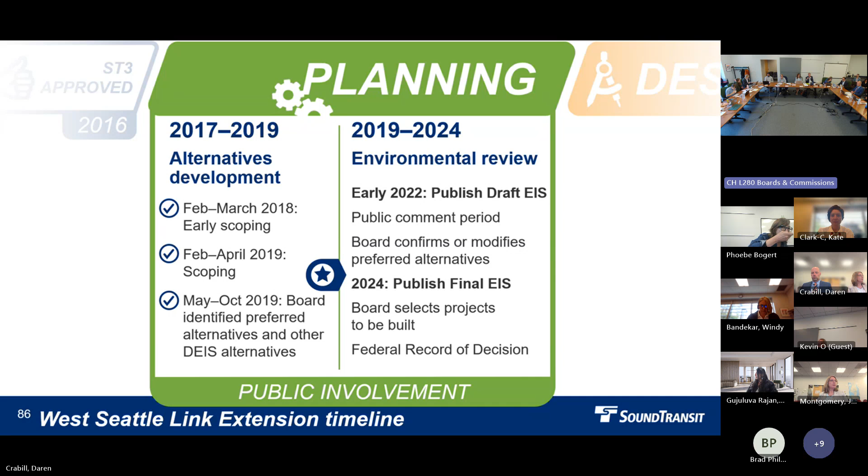I'll skip to each of these slides and just quickly note we went through level 1, level 2, level 3 analysis with a stakeholder advisory group and an elected leadership group, ultimately making recommendations to the board for inclusion in the draft EIS.

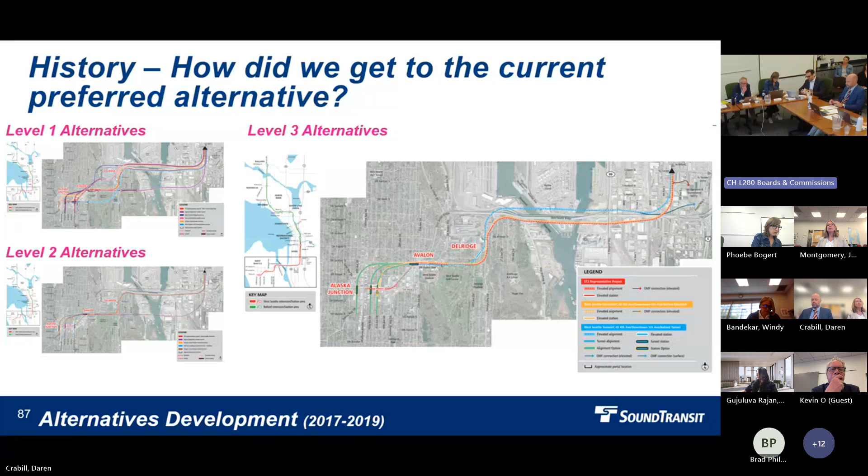The Yancy/Andover alignment came out of initial assessments requested by the board in order to minimize residential displacements in North Delridge and also to connect to tunnel stations in the junction, but in a more affordable way. That's a really important point for Avalon, because to have a tunnel station in the junction with a below-grade Avalon station, this alignment through Delridge is necessary to meet the lower cost for that alternative.

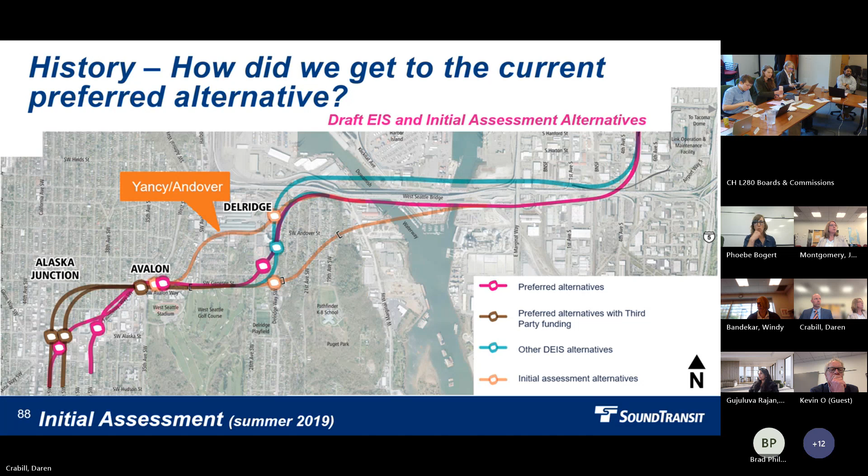Following that initial assessment, the board identified all of the alternatives for the draft EIS, including those that could connect either the tunnel or the elevated. After the EIS comment period, which had over 5,000 comments from agencies, tribes, and the public, they modified and confirmed the preferred alternative for the West Seattle Link extension, which includes a retained cut station at Avalon that connects to a tunnel station at Alaska Junction.

A couple of things we heard through this entire process before handing it over to Darren: there was a strong interest in a tunnel station at the junction to be more affordable and comparable to the elevated alternatives that were in the draft EIS, and this alignment does that.

There's also interest in lower height guideway throughout Delridge. By connecting to a retained cut and then into a retained cut station, we're able to lower the elevated guideway and the station height at Delridge as well.

There's also a really strong interest in the connections between the buses on 35th, which serve communities to the south including High Point, and a really great transfer environment. So having entrances on both sides of 35th eliminates the crossing of a busy street for many people as they're transferring between bus and rail.

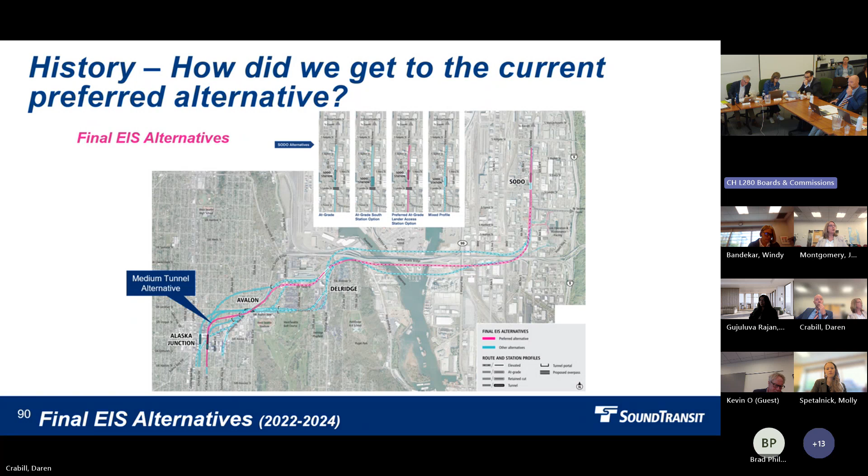We're going to get into more about the station area context plan, but... Is there a section that shows, you know, here's Delridge, here's Alaska, here's why this was the happy medium?

Something akin to what we would be doing in the future review of Delridge. So in today's session, we're dealing with everything from Avalon out to Alaska. We'll go back the other way next time.

Next, when we come back and talk about Delridge, we'll be talking about the elevated guideway on either side. They're certainly connected, so it's a really great question.

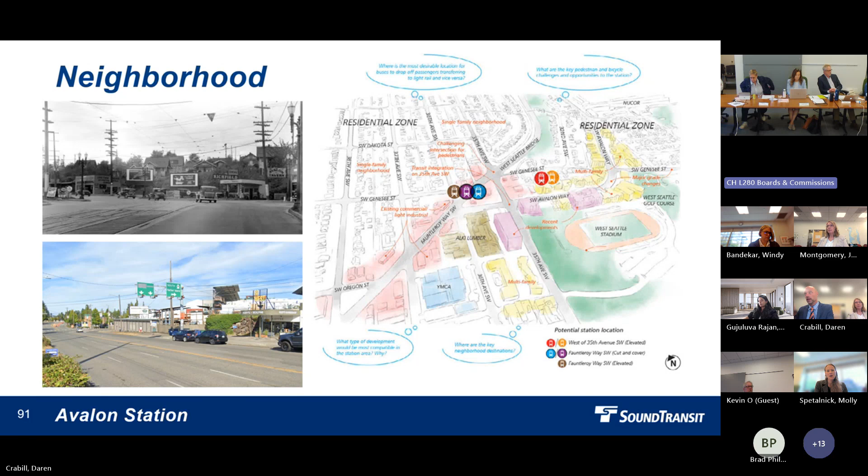Similarly to Alaska, I'll walk through some of those early ideas in the first couple of phases. Again, we're talking about years of work in a single slide, just to set the stage. This is a really dynamic intersection with ostensibly three different arterials converging at the same place. There are also key pieces of recent development and future development likely to happen, some small commercial corridor, as well as important community locations like the YMCA and West Seattle Stadium. At the time, the team highlighted how we can locate pickup and drop-off, and prioritize safe pedestrian and bike circulation as a priority, and whether there are ways to connect the key destinations through those paths.

As Jason outlined, the cut and cover actually provides some opportunities for locating the station at the crossroads, and I think we'll start to see some of those in the next few slides. Here you can see some of that next level of analysis around existing land uses, ridership forecasts, and how people will get to the station, with the primary mode being walking within the station area, and the next being bus connections.

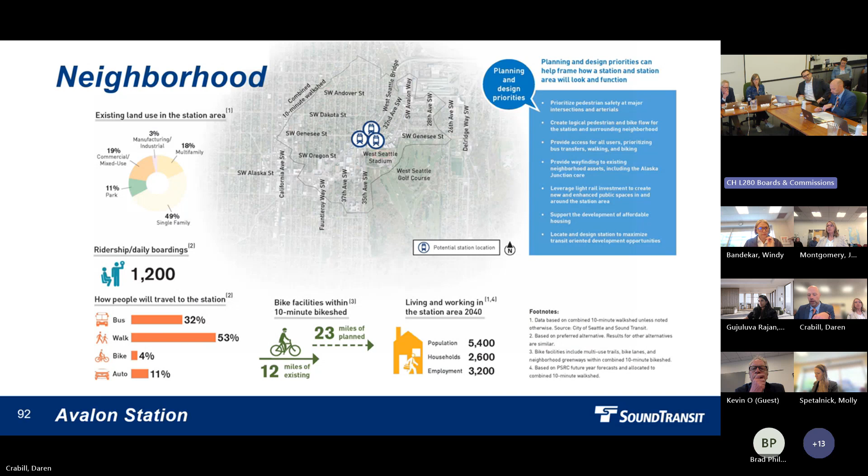The priorities I just want to highlight that were reinforced at this phase again are pedestrian safety at the busy intersections, helping provide a logical pedestrian and bike flow to the stations, and whether there's an opportunity to create new and enhanced public spaces in the area.

Here at Avalon Station, again, it is rooted in that emergent urban land use type. We'll see that there's recent development happening in and around the station, but it is primarily located in the south and east quadrants of the station area, so there's potentially more to happen around there.

This doesn't have the large block sizes that Alaska Junction does, but because of those arterials it's split up, so you don't have that great continued connection. But because it is walkable, we're noting it as a walk, bike, roll station, with mode share expected to be primarily walking. How do we take that into account as we consider our improvements in and around that station?

As we look to the right side of the screen, we see that it could move—you can see the arrows of potential movement. It could continue to be a walk, bike, roll station within the established urban area, but we see it becoming more multimodal over time as bus connections develop and people get used to using light rail in the area, possibly utilizing those connections in the future.

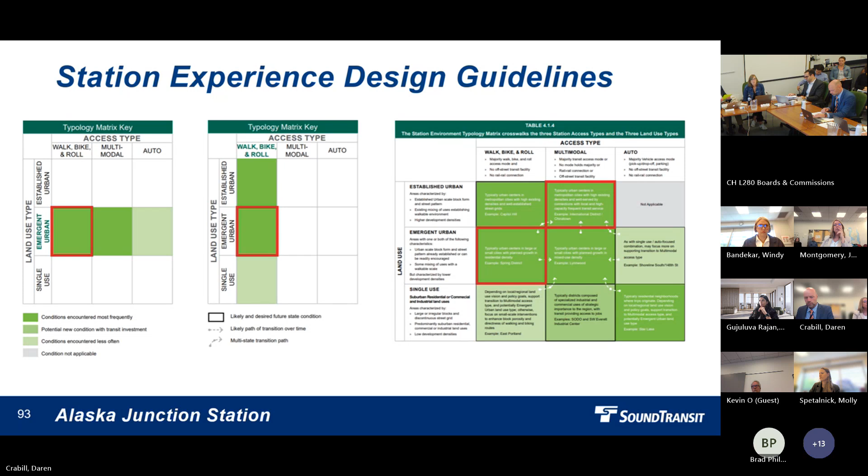We point out that we're looking to provide bike or bus connections close to the station. At that time, King County Metro was looking to put bus stops more rooted on Avalon to make that connection, in addition to on 35th, right in front of the station areas. They located the PUDO and paratransit on Southwest Genesee Street by that northeast penthouse—again, a quieter location outside of the movement of buses and the key pedestrian and bicycle movements.

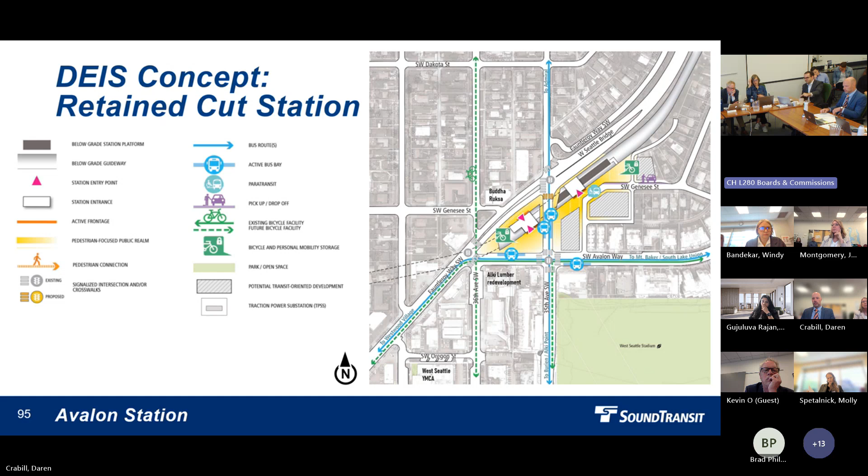This is also the portal location, as Jason mentioned, as a retained cut. You're coming from the northeast into a retained station area, and as it goes under 35th and to the west, that is where the portal and the start of the tunnel begins. So there are those similar ancillary facilities necessary to provide air circulation there.

You'll notice in some of these subsequent diagrams that the station locations were in a different place, but ostensibly the same takeaways noted here transfer over to where the preferred alternative landed. At that time, some of the priorities were: can we partner with the city to upgrade facilities for bikes and pedestrians connecting in the neighborhood greenways? How do we locate bike storage in an easy and accessible way for those who use it? And third, explore potential elimination of the slip lane to reduce conflicts with pedestrians and narrow that cross section.

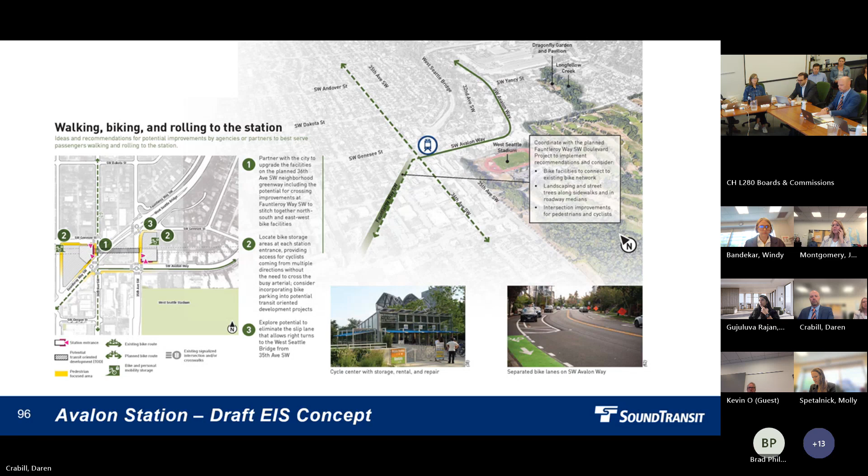Thinking about bus connections, how do we provide those seamless transfers that happen to neighborhoods from the north and to the south, like High Point? There's a concerted effort to locate those bus stops in close proximity to the station.

I think there's also interest in exploring slow streets for plazas and those bus zones, perhaps coordinating traffic signals or crossings. There are other operational types of things you can do for safe pedestrian and bike access.

As we look to support current and future land uses, we've seen quite a bit of growth in the West Seattle Triangle area over the last few years, and more is planned. How can we site the stations to further that interest in the neighborhood? Can we support active uses along those key corridors and frontages, either of the stations or with the development that happens adjacent to it?

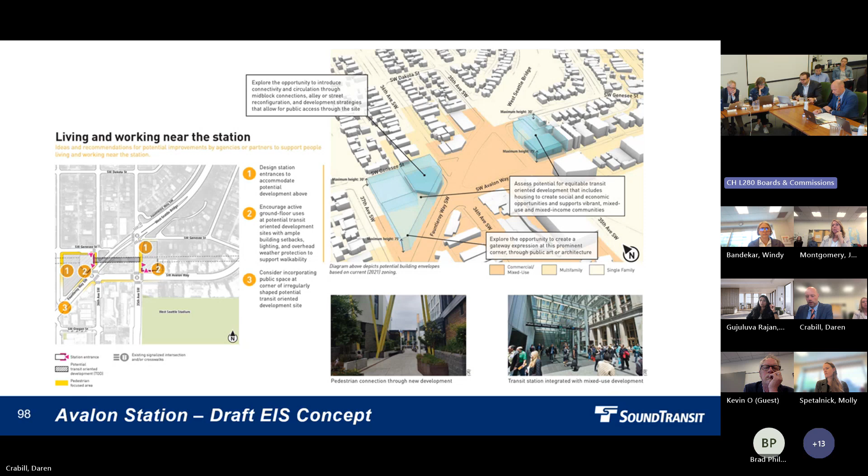Also consider public spaces that enhance the station entrances. Can we create plazas, wide sidewalks? We'll see some of that coming, accommodating that transfer zone and mixing zone between different modes coming to the station, including transit transfers.

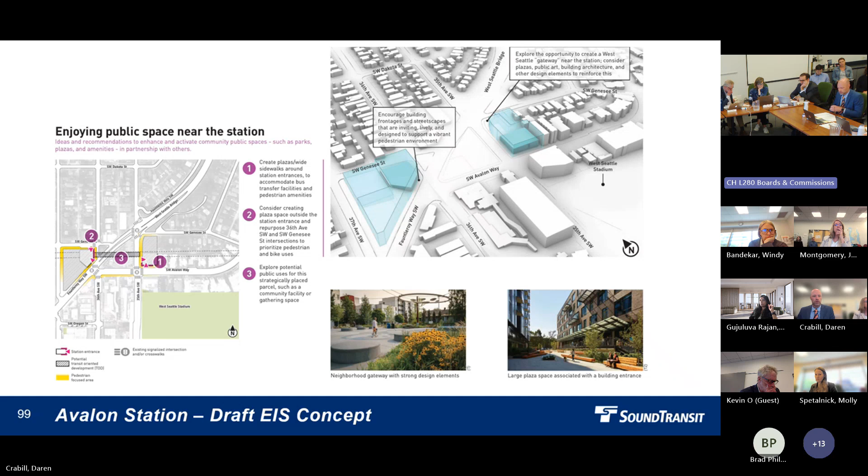As we move to the preliminary engineering concept plan, you'll see that where we ended at preferred alternatives is quite similar to what we see here in the PE concept. With some slight modifications, we've added a pedestrian crossing on that east side leg of the West Seattle Bridge, crossing Fauntleroy Way southwest, north to 35th.

You'll also see a change in where the bus stops are located. King County Metro continued to look at how best to provide frequent bus access, and decided to remove the bus stops on Southwest Avalon Way and use existing bus stops near the West Seattle Stadium. We still do have some buses that land right at the entrance on either side of 35th.

I'll also note that, as I mentioned, ancillary facilities that need to co-locate with the tunnel portal are at that triangle location, and so that footprint of the building is somewhat bigger.

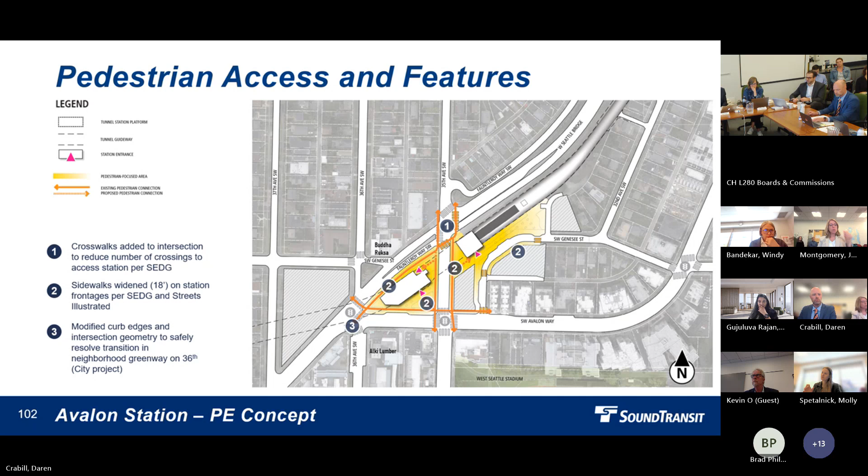Bike lanes: there are existing bike lanes on Southwest Avalon Way. We are bringing those up onto the sidewalk for access to long-term bike parking. You'll notice the bike parking spaces are reduced because they're tied to our ridership numbers, so you'll see 20 long-term spaces and then 10 short-term bike rack spaces. We fully expect the Greenway would also connect well into these networks.

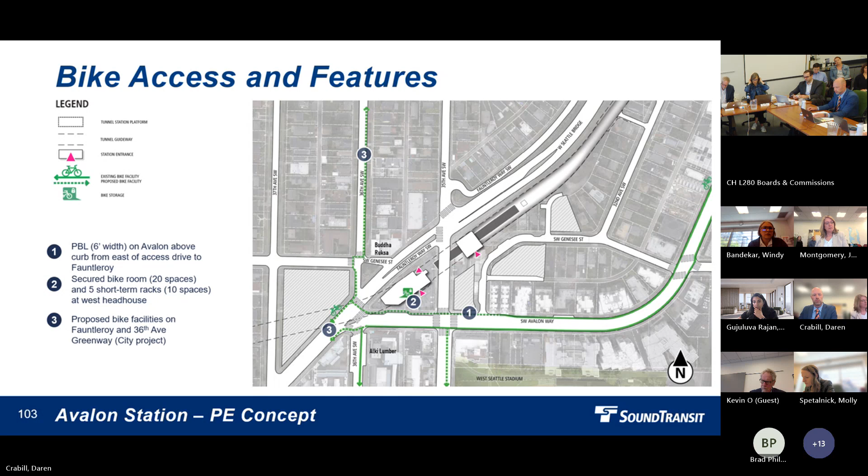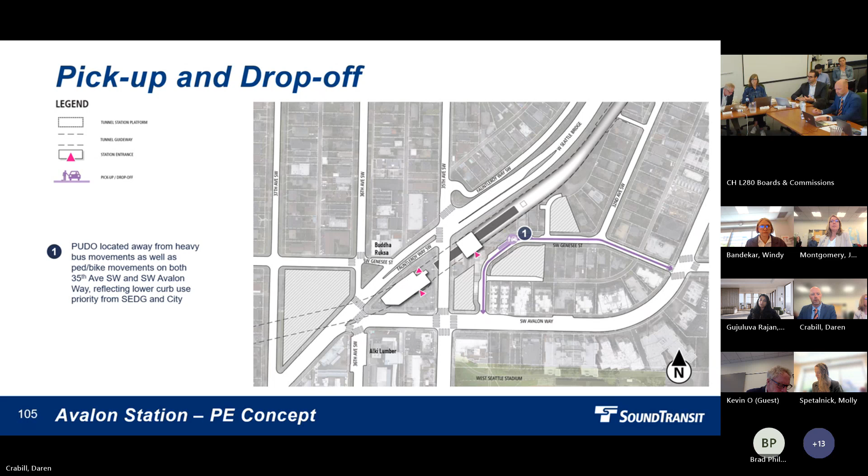Transit integration: I noted some of where the bus stops are relocated during this PE phase, and also that the paratransit, ADA, and pickup/drop-off are co-located at that northeast entrance with its own space. Here we're showing pickup drop-off at that northeast entrance on a quiet street. It's supported by the city and our guidelines.

As we take a look at TOD, all of the transit-oriented development sites at Avalon are adjacent transit-oriented development sites. None are expected to be joint development opportunities. Part of that is just the geometry and access points, potential access points, and the size and space necessary for the stations themselves and the complexities around that retained cut condition. So we feel like the best opportunities for development are in those adjacent sites that we are using for staging and construction during the construction of the line and the stations.

I will note that I didn't put a number across the street at Fauntleroy to the west, but that is also expected at this point to be part of the staging area, though that would also be a development.

Plazas are provided at each of the station entrances, providing that sort of transition space from sidewalk to the station lobbies themselves.

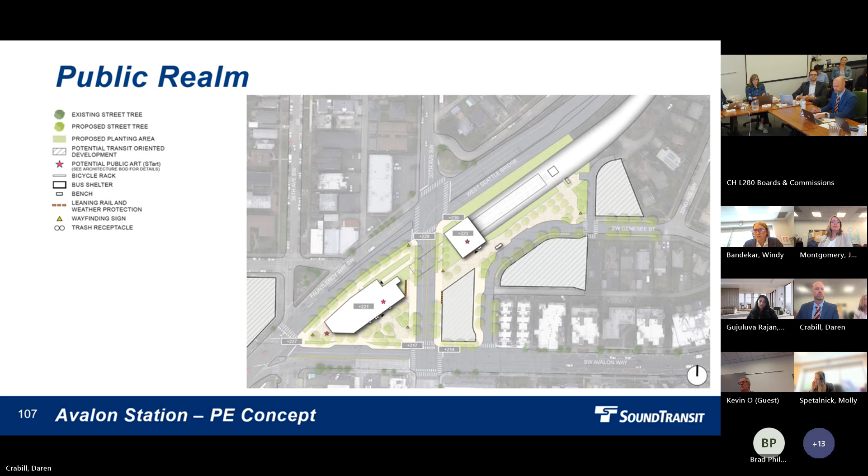Here you get a better sense of where potential TOD and what kind of massing that might provide in and around the station, those properties that we are using for staging and construction.

These again are all adjacent, so future, not during the construction of the station, but post construction.

Key themes from the fall engagement: this is a lower ridership station location, and we see that in how respondents said they would use this as their primary station, and that the walking and transit are somewhat in line with what our projections would see as the split of mode.

Similar to what we saw at Alaska Junction, people primarily want to see more affordable housing and rental housing as their primary TOD use. And at the ground floor level of those activated streets, food and drink, retail, and convenience and errands are the top priorities among them.

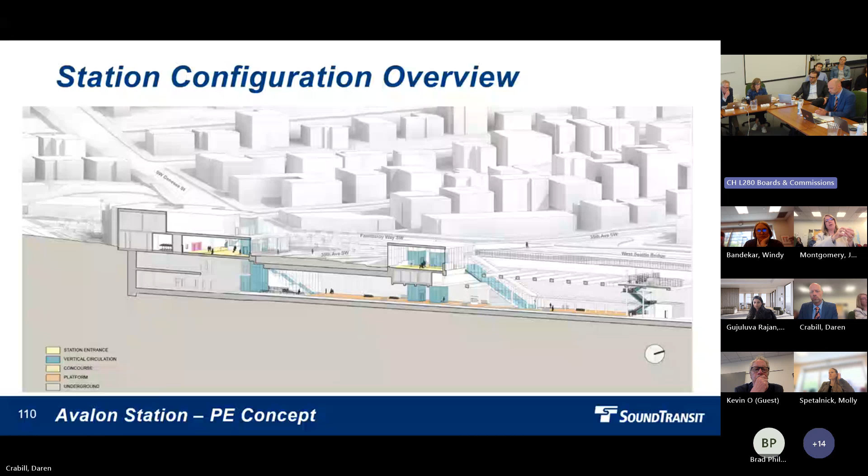And then we also have the fan plant. This is the end of a tunnel, and we've got to be able to evacuate the air in the event that smoke builds up. You do that at the end of the tunnels, you suck the air out for safety. So there's no space between where the trains go and grade to put that fan plant, so that's why it's above ground, integrated into the head house of the lobby.

Dirk, you need to put yourself on mute, but thanks for being here. I just wanted to follow up with you. I might be able to. Can you mute him? All right.

So now we're looking at more of an aerial view axonometric, and we've integrated some of these green pathways of pedestrian paths coming into the station. I believe the data says that most people are actually riding from that south side of the site, and so a lot of the station is oriented that way, but you can enter from the north side of the site. So you see the passenger pickup and drop off loop on the right-hand side of the page.

35th Avenue is going up and down, Avalon's going straight across, and Fauntleroy is diagonal here. So you can see on the left-hand side, the left-hand head house in the triangular lot, about half of that space is dedicated to the lobby space, and then the other half is back of house spaces. We do recognize that that does make more of a wall around that place.

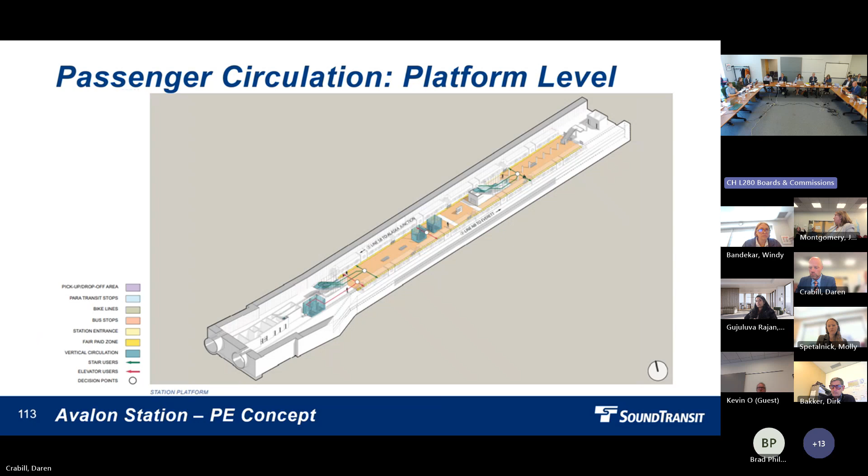Yeah, well, one aspect that you haven't really come to life on these site diagrams is how busy the traffic is around there and how motion noisy it is around that station. So we're trying to think about that, and the fact that we've heard the neighborhood feels this is a gateway spot as you're coming off the West Seattle Bridge, and the grade is funky here that we need to keep our eye on.

Okay, so this is showing the massing overall. It shows some of the street trees, it shows the plazas that are in sort of the south to southeast of the stations. So on that triangular property, there's a plaza and entry going from the corner up into the station space. This landscaping—it's not called out here, but there's that open space that could be available for TOD. And then the passenger drop-off area.

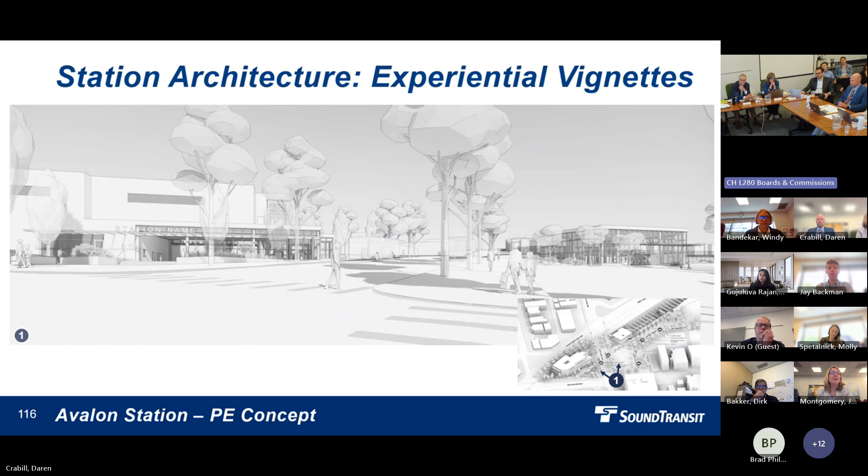Then this is as though you were on Avalon, looking north to the station. In the future we'll have to ghost in some of those TOD parcels. And then you can see the entryways as they would be seen from Avalon.

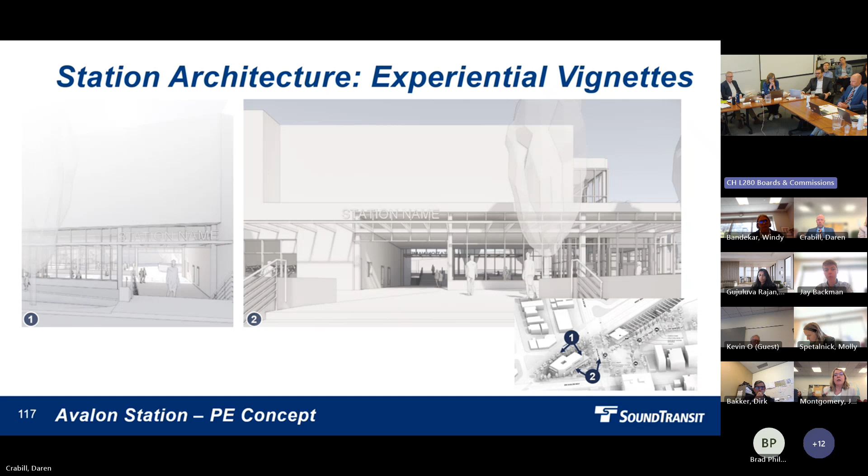And then this area, on the left-hand side, this is a vignette of what the entry looks like, more of a close-in view, as you were coming from Fauntleroy and entering into the north side of that head house. And then on the right-hand side, same head house, but we're looking at it more closely from the south side. Again, lots of transparency—you can see right through it, and really understand where you need to go and see in the distance.

And that is our overview of Avalon for you. So hopefully that was somewhat helpful.

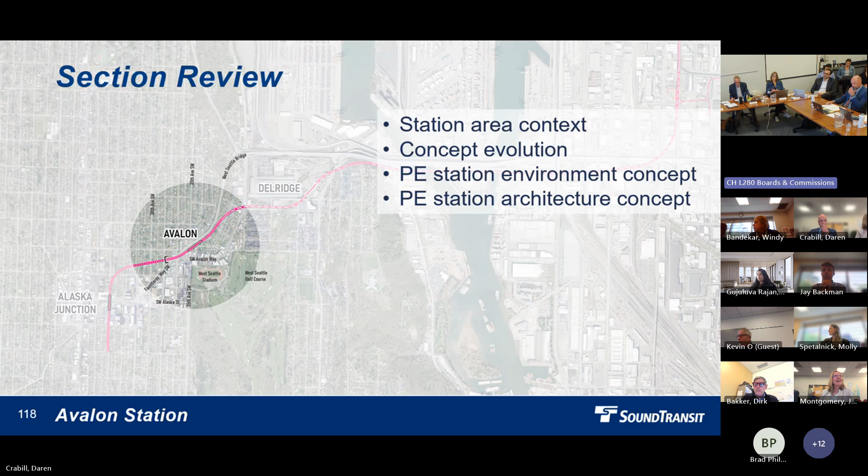Who has a question? Ben, you're on. Wondering—so I understand that the fan plant is the exhaust for the whole tunnel. Is there a reason that it couldn't be—did you go to page 111?

Just flip it, move it to the other side. So instead of being on that corner, which seems like it could be fairly active, kind of a little commercial corner, could it be flipped to the other side, in the cut portion, and maybe extend it to the other side of the other head house, so it wasn't right there?

Yeah, hey Dirk, since you're on the call, hopefully you heard the question, can you help us out? Can I answer the question about the ventilation building? Well, I can give some indication for the reason why it is there. The intent for that ventilation building is to vent the tunnel, not necessarily to provide ventilation for the station.

The intent of this design is to maintain the station somewhat as a station that doesn't really need ventilation. So if you were to put it on the other side, you would have to basically cover this station and vent the entire station. It's very strategically placed to limit the size of it and to keep the necessary fire zones in this tunnel versus this station. So if you were to place it on the other side, it will change the entire ventilation and fire protection design.

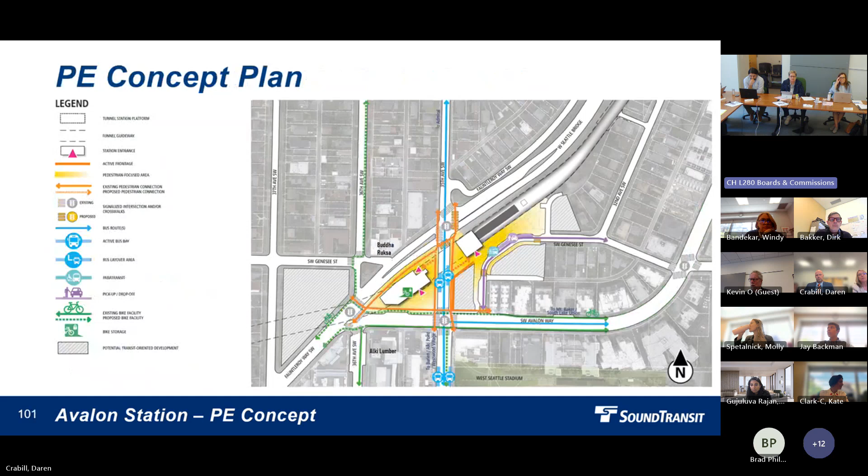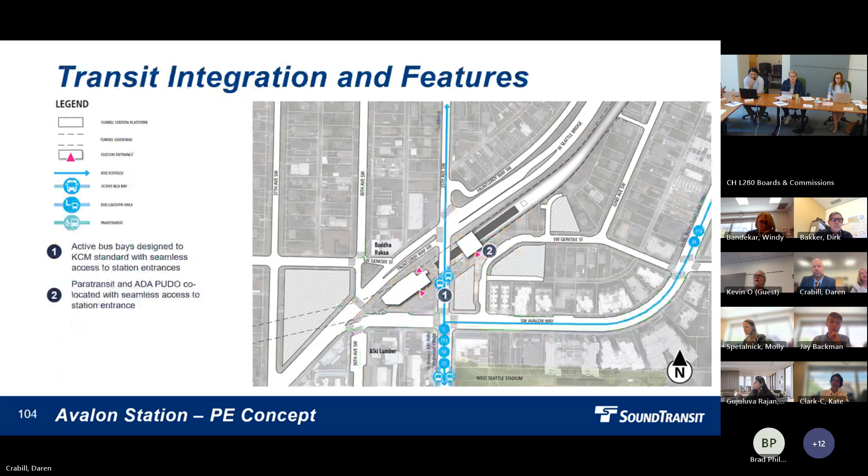Because I want to go back to the emergent versus the established - I totally get it, even more so than Alaska, how emergent this neighborhood is. But it seems to me like what you're starting off with is bus transfers, and what you're hoping to have is people in the neighborhood who use the station. So walk and roll would increase if all of those are multi-story apartments, right? I'm not quite sure that's how you structured your analysis, but it's almost like you're betting against that future with not straddling Fauntleroy and the blank wall facing Genesee. I'd love if you could talk about how you balance that - the questions we've heard so far are engineering and economic. But how do you soften that trade-off so that everybody gets to win a little bit, rather than it all just being engineered for this future?

Well, I think there are a couple of things we haven't talked about, which is the Fauntleroy Way Boulevard project that the city has planned and designed to a certain point, which we'd put on pause until the station location settled down. Now that we have a preferred alternative, assuming the board acts on this, they can make modifications to that Fauntleroy Boulevard that would be much more beneficial to pedestrians and bicyclists going forward than the current iteration of Fauntleroy Way.

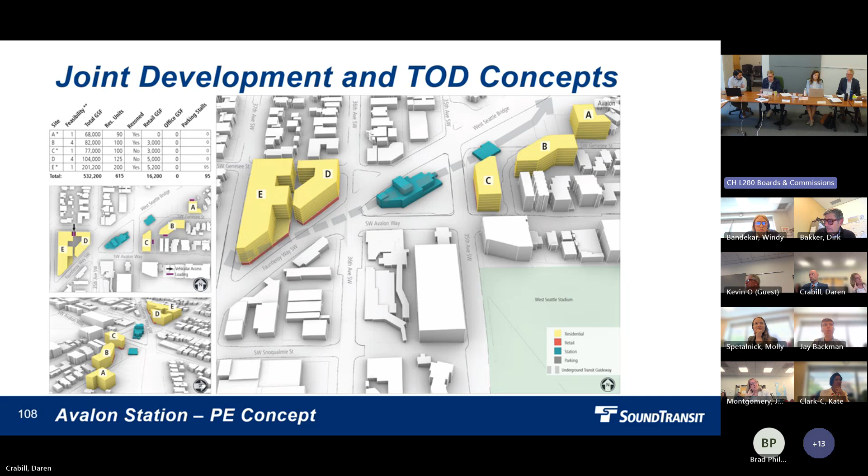Sure, thanks. So I'm going to jump us into access and circulation questions. I'll take the prerogative and ask the first one. Could you go back to the slide you were on previously that showed... yeah, maybe that'll work.

So what I'm curious about, it seems like those bus stops on 35th are pretty important in terms of lining up with the station access points. I know you're not Metro or SDOT, but SDOT's in the room. I know we're not getting into specific channelization questions today, but there's a slip ramp right turn from 35th onto the bridge. I don't understand how a bus stop works there, candidly. Right now it wouldn't work. So can you say more about that?

Well, at this time, as part of our PE explorations, we removed the slip lane from 35th to West Seattle Bridge, and the slip lane from West Seattle Bridge back to 35th North. We had those conversations with SDOT during PE, and suggested those as possibilities to prioritize pedestrian movements, safe crossings, and reduce some of those widths.

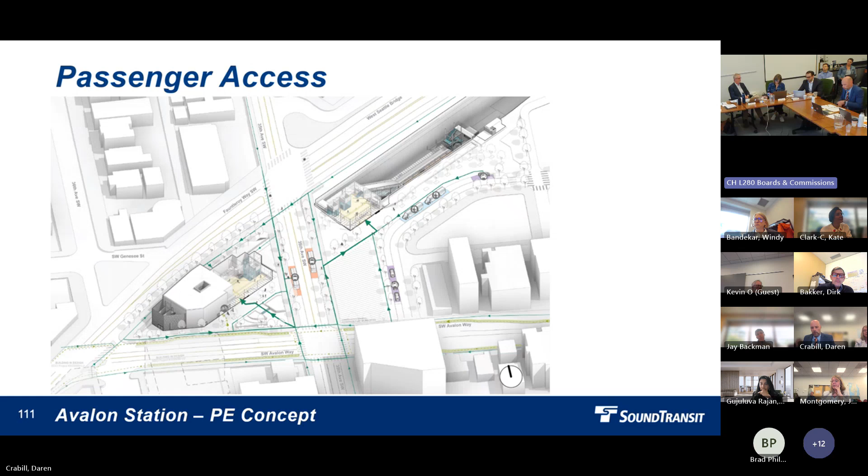I think it's woven in. I'll go back to that slide for a moment. Safe and vibrant, as I mentioned, is a top priority and preference for every station, from everybody I talk to, no matter who you are or where you live. So it's always at the top of our minds.

It's at the top of your mind, which I appreciate, but in terms of what you heard from the community specifically - was it 'we really want the station here'? I'm asking for a summary of what you've heard from people who live here now about this topic, if there's a way to summarize that. I know it's a lot.

We've heard a lot, to dovetail on what Daren said. With all of the alternatives, this area around Avalon is challenging. We've heard it's very important to create safe connections between one side of the station area and the other side, for all of the stations. So that's what we really look to do with this station.

We've heard a lot from folks within the bus transfer shed that direct connections from bus stops to the station are good. In fact, that was one of the factors the board considered in the preferred alternative, because you have bus stops on both sides of 35th. With the station entrance on the west side of Fauntleroy, you didn't have as direct a connection - you would have had to cross an arterial from that bus.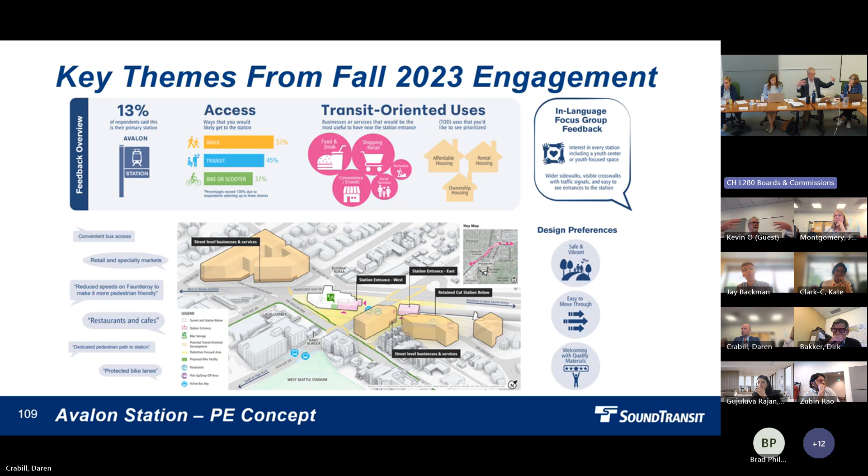So that needs to happen, and I'll be interested to get more into the Delridge station later. On this station, I am inclined to make street design a condition, because these intersections don't work without a lot of help—in terms of design, signalization, the cross section.

The only thing I'm reluctant about is that we're essentially conditioning both Sound Transit and the city, and the city is not the proponent here, but they have a huge role to play. So I think we just have to say that, but it needs to be a condition anyway, given the situation here. Nobody wants to see somebody trying to catch a train get hit by a car running across the street to catch it.

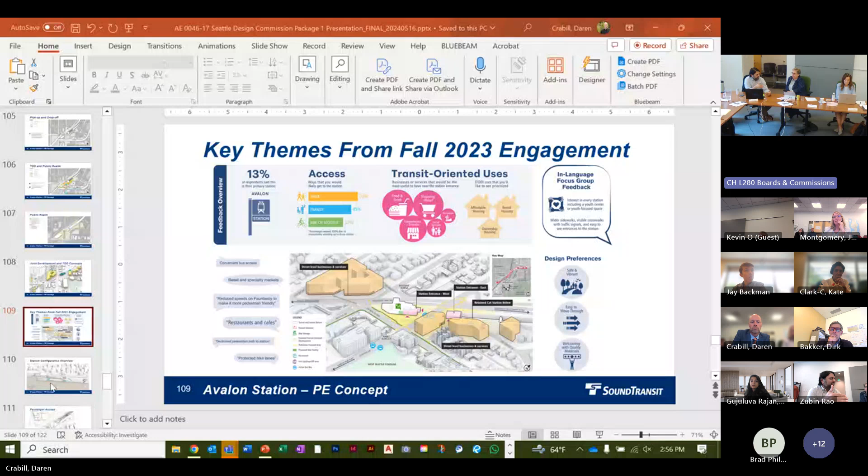But the corner is what's, I think, very problematic, right? And it's just super blank. So I think—

Sorry, Jake, can we? Yeah, I've been trying to, sorry. We're just talking about it.

If you can't get rid of it—you can't get rid of it, you have to feature it.

Yeah, and I would say—I was going to use the same word—I think it is unacceptable at that top. We're totally ignoring, with all the views and all the thought given to the south, what it's like to be at the north. And people are coming from there, people are driving from there. This is part of our urban condition, and it can't just be a blank wall with an appendage back-of-house there.

And I think the goal should always be that it's elevated—light rail is an amazing thing and it should be coming in and elevating something. Right now we've had Taco Time there for years, like in a sunken hole, and this should be way better than that. You don't want to miss that.

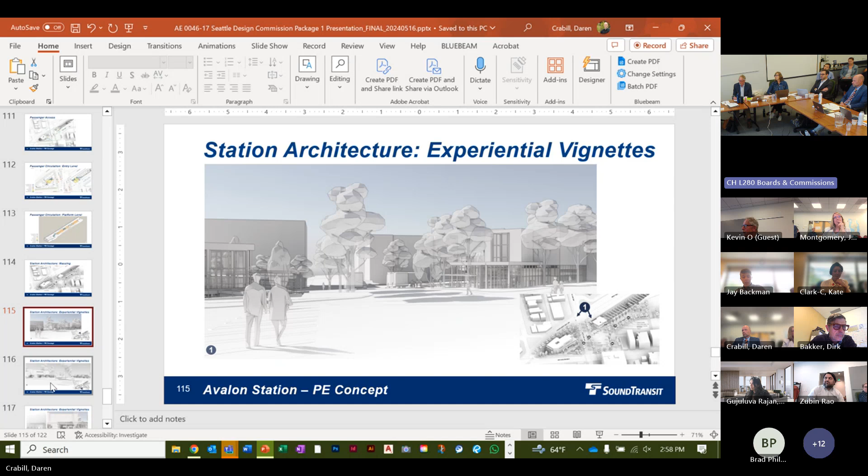And if you stand on Fauntleroy, you cannot hear the person next to you. So we're adding more noise, and I want us to be mindful of that as well.

Going to the vignettes, what I don't see here is all of the traffic that's there. Show us these vignettes with what it actually looks like, which is a stream of semi trucks, because that's really what the pedestrian's going to be looking at, a backlog of cars. We do need to be mindful of that visual impact. It's not going to be this nice, beautiful station. If I'm trying to walk across Fauntleroy, I'm going to see traffic, and that's it.

To that point, I'm just wondering, this is more of a question. I don't know, pardon the pun, if the train has already left the station on this, but if we are still too far away from the initial proposal of there being pedestrian access on the other side of Fauntleroy, because it seems like such a crucial part of accessing this wedge in a 1950s car-focused area that is going to change. So possibly you need to see a cross section that proves why that can't work.

It seems to me like I understand there are real monetary considerations, but the pedestrian usage of this site is higher than the Alaska Junction. I know the numbers are higher at Alaska, but 53% here compared to 40 for the other one. So I'd like to see a little more argument than just the economics of it, which I understand is a huge part of it, but this area is transforming and it's a really exciting opportunity, instead of just trying to wedge an impossible arrangement into providing a whole gateway, as people have been saying, also to that northwest side.

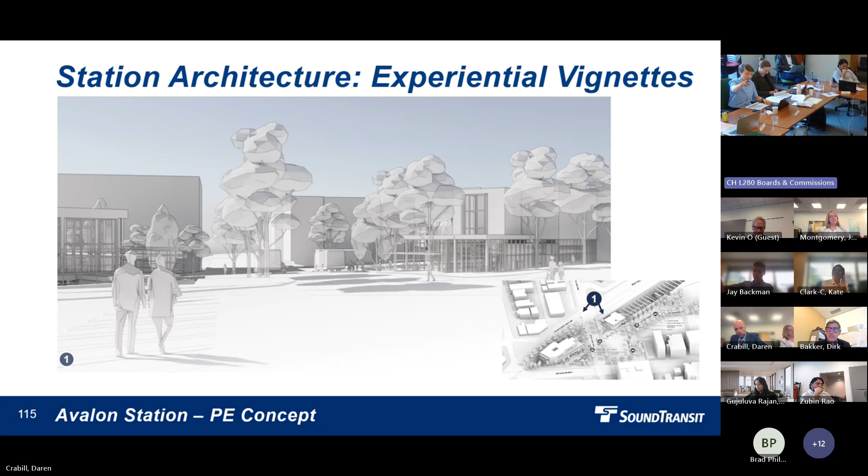The other part that I'm concerned about is where you have the pullouts for the PUDO on the north side of Genesee, which means you would need to approach from the east side, if you're coming from, say, 30th. I'm not sure if this will make more sense if I could point on the screen - could you go to one of the concept plans of the street grid? One has a street grid, please. That, or even the one that can go out to include - yeah, this one, perfect.

So if we have a lot of vehicle access on 35th, to drop someone off, you need to turn right, come along Avalon, turn left, come along Genesee, and then drop someone off and get out, which to me seems pretty out of the way. So I'd also encourage you to look at, do we have to use Genesee?

Can there be some other loop in here that comes off of 35th, maybe off of Avalon? We're really making note that there's a bicycle route there, and there's already a ton of conflict points with driveways along Avalon with these existing buildings. So really be mindful of where this access point is, and look at whether you really want to use Genesee for that. That's something I'll leave you to coordinate with SDOT and come back to talk with us, but I want to point that out.

If we roll that into the street concept plan, please. Yes, so I was going to say, is that a separate recommendation or is that rolled into the project? Is that more of a street concept plan item? I don't think that's a street, because it's a local street. That's not going to be part of the channelization discussion. But I think it's...

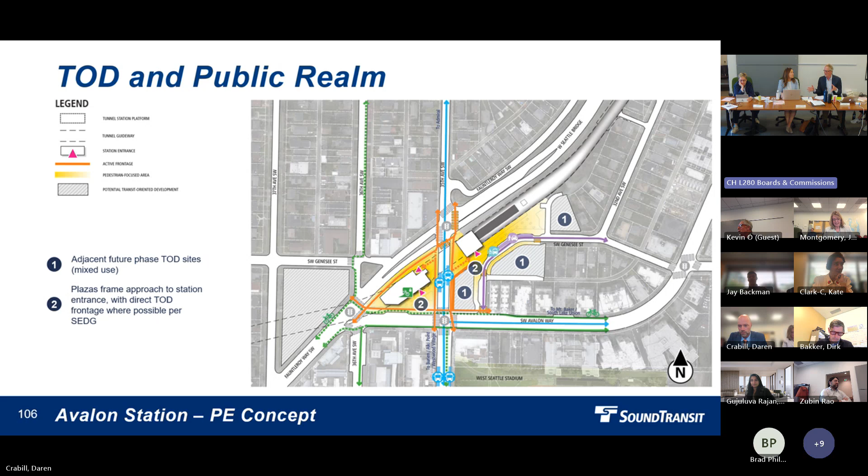Okay. So, boy, all right, I'm gonna. This is good. Honestly, I've heard four different ways of expressing this, so I'm kind of lost on what we want to say, but I'm going to try.

I think we are contemplating approving preliminary engineering for the Avalon station with a condition I read earlier relating to a subcommittee meeting in a separate meeting or meetings, because it might be more than one meeting, to look at streetscape, sidewalk widths, crossings, channelization, bus stops, all of it. So we've got that as a condition.

I think our recommendations: one, we want more information on pickup drop-off, in terms of why it's there, or could it be done separately? I think that's just something we would like more information about next time we come back.

Then I think I heard a recommendation about design cohesiveness around looking at the entranceway, portal, the head houses. I know you're in PE, there's a lot more design to do, but I think we're all looking to see how this all works together as a cohesive whole, as a station, with the challenge of there being a portal right there in the retained cut. So I think that's a recommendation.